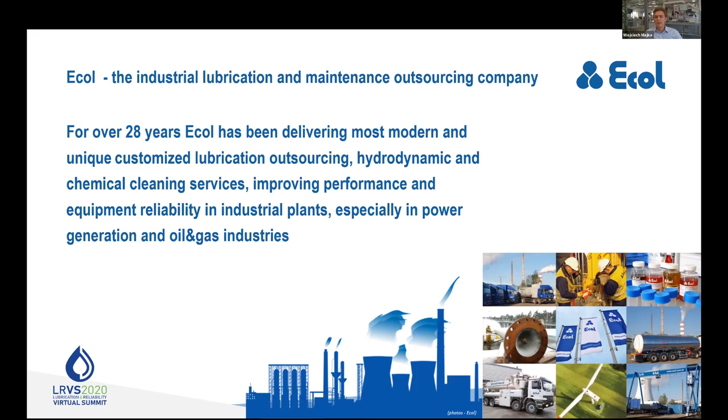So impacting the reliability of equipment in demanding customers, improving performance in industrial plants, especially in power generation, chemical processing, and heavy industries from the very beginning. The overall range of activity is mainly lubrication management activities, and nowadays in compliance with the ICML 55.1 standard, which I will speak about later, doing oil analysis. Just behind me is our lab, our oil analysis laboratory, live view. We do specialized flushing services, cleaning and flushing for big rotating equipment, and there's another presentation by Tomas Klima today later about it here at this outstanding summit. We do chemical services, chemical flushings, different applications for equipment, and other things related to lubrication and reliability.

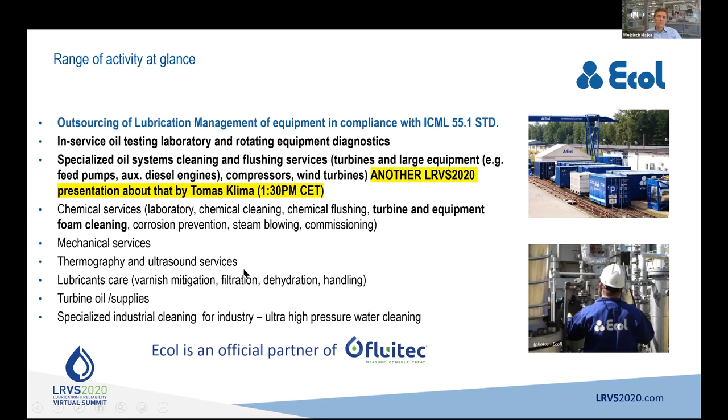We are an official partner of Fluitec. Also, the thoughts that we share are aligned with the concept of smart solutions, smart lubrication. We are more than 340 persons on board in our company, more than 50 engineers. We are a private family-owned company, with almost 30 years of history.

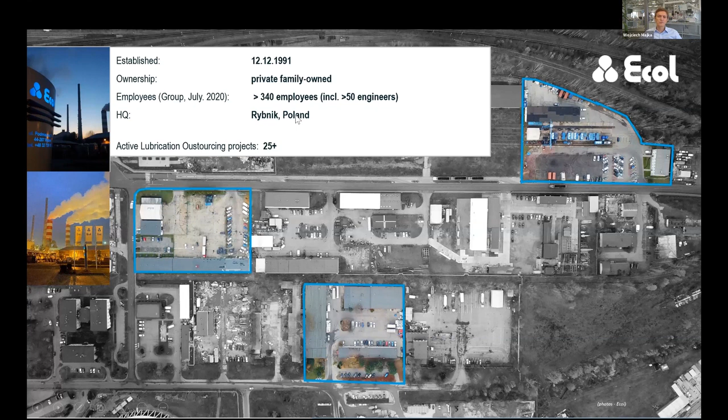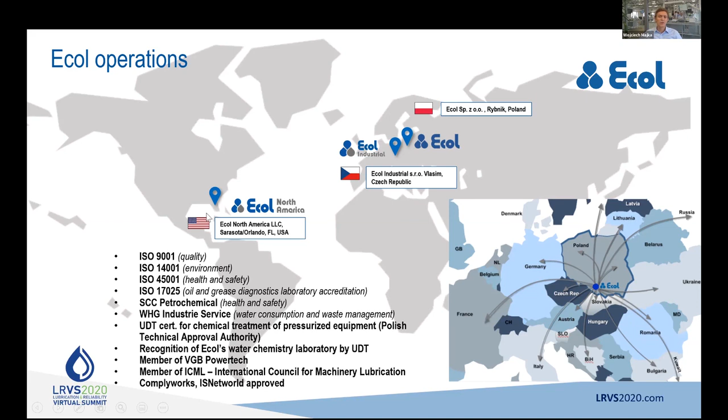We are certified against most international standards in place, both quality standards, ISO 9001, 14001 and 45001, but also different standards required for being an industrial company. The values that we share are being professional and really being fair to people, to the environment, to customers, and doing smart things - how to make things smart.

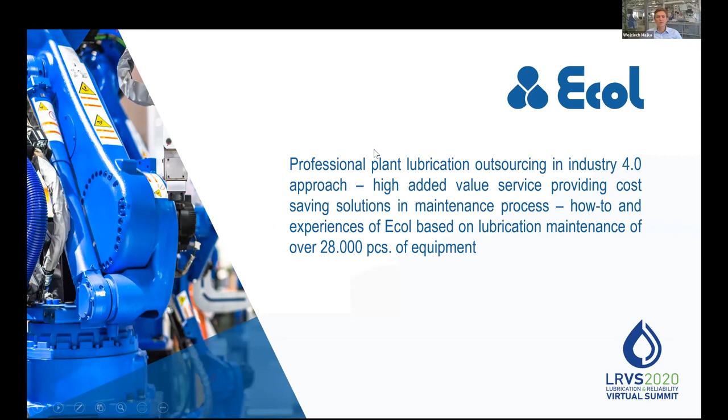The background for my presentation is the daily maintenance we serve to our customers of more than 28,000 pieces of equipment. The second part, the link into Industry 4.0, is that most of our customers and industry facilities tend to be more and more Industry 4.0 plants. Of course that's a huge thing, a separate discussion for sure, what is Industry 4.0, but if we take a look at the timeline, industrialization started, let's say, end of the 1700s, and nowadays, a couple hundred years later, we are doing really outstanding things. So IoT, big data analysis, smart sensors, everything connected, linked. That's how we need to fit the lubrication needs as well.

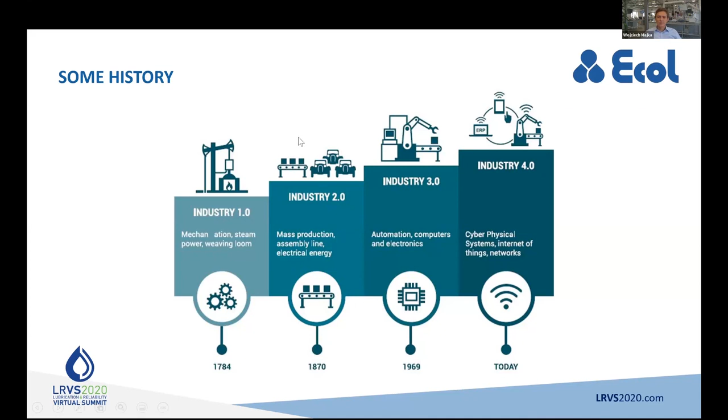I have something with me, that's the old-fashioned lubricator. I don't know how old it is, probably maybe 50, maybe 70 years old. It's well done. It doesn't mean there wasn't lubrication at that time, and it still is, but the reality changed a little bit. So that's why I'm talking about Industry 4.0, outlining that this is something new.

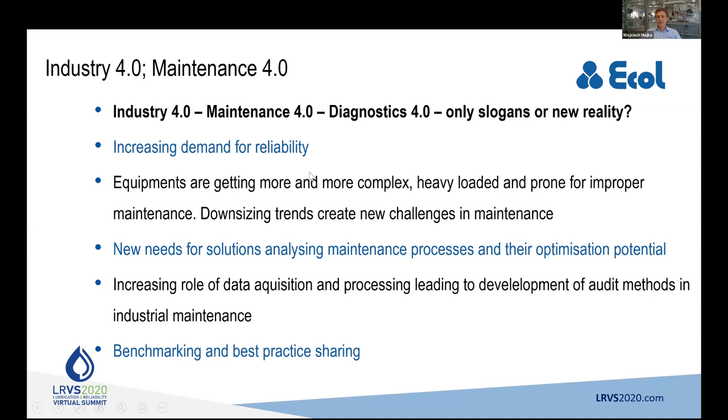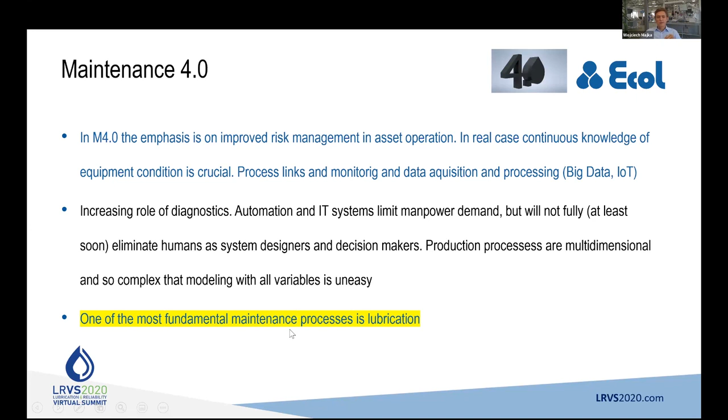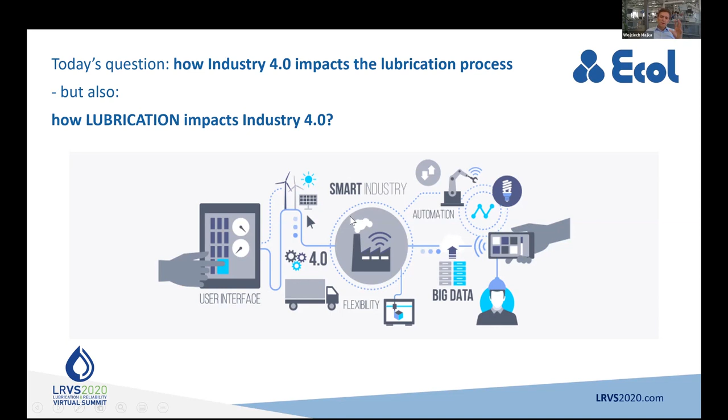So what is it about? Increasing demand for reliability, less costs, more reliability, better productivity, risk management, of course, links between machinery, between sensors, between smart diagnostics - everything that makes reality a little bit different. But lubrication still remains one of the most fundamental processes in industry. So the question for today is how Industry 4.0 impacts the lubrication process. But also, the other question is how lubrication impacts Industry 4.0. It's a very specific connection. Our approach, our understanding, is that we can transform industry through lubrication to Industry 4.0. It's a good example of how we can tend toward being modern.

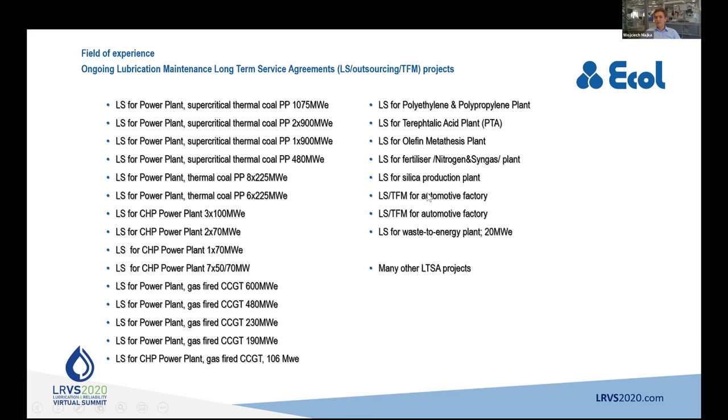Based on that, I want to share with you that the pieces of equipment, single pieces of equipment, more than 28,000, are daily maintained by my company, doing daily maintenance tasks of different scale and range that we'll take later. But the number of lubrication service points, having something in common with maintenance of lubrication, is 65,000, served by 170 people every day. So we can imagine how big the scale of problems and logistics and engineering behind doing it well really is.

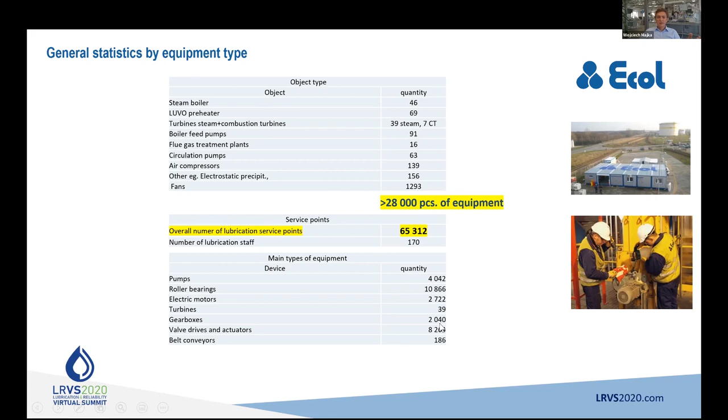Here is the spread or share of different equipment that we have. You can see pumps 4,000, roller bearings almost 11,000, motors, valve drives, actuators, etc. Big numbers, which consume annually around 450 tons of lubricants.

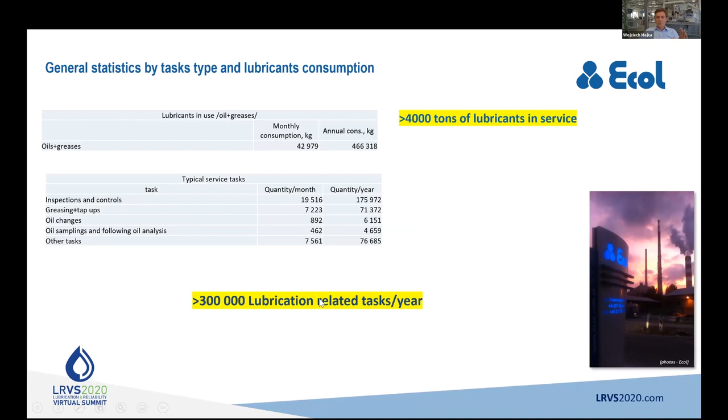It's a big number: 300,000 lubrication tasks a year. Based on that, we have done a program of introduction to lubrication management for our customers.

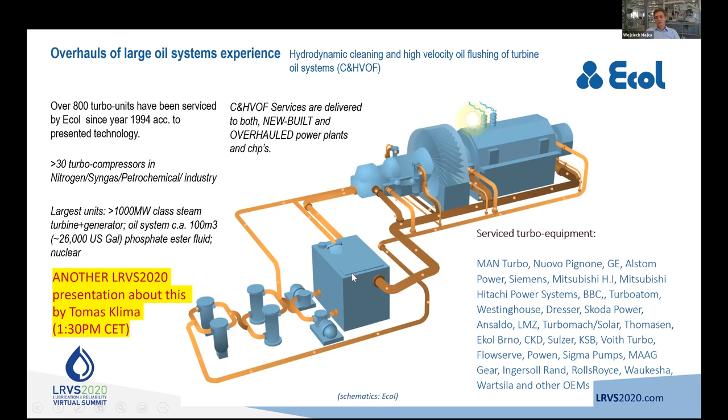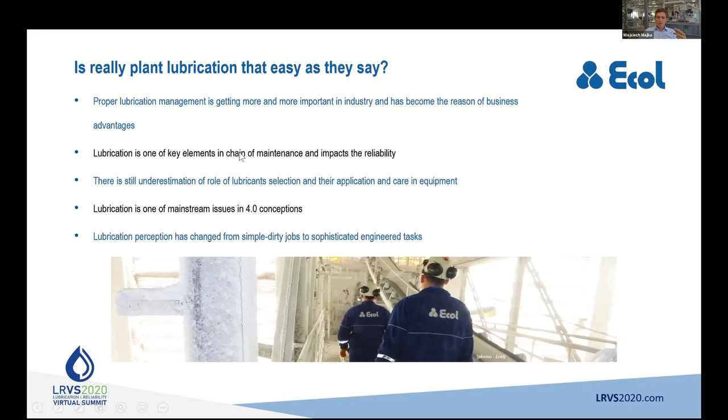I'm not even speaking of overhauls related to lubrication, but if one says lubrication is easy, I wouldn't think so. Simple tasks may be easy, but managing that in a good way, so it gives you added value and lowers the ownership cost of the assets, is very tricky, especially now.

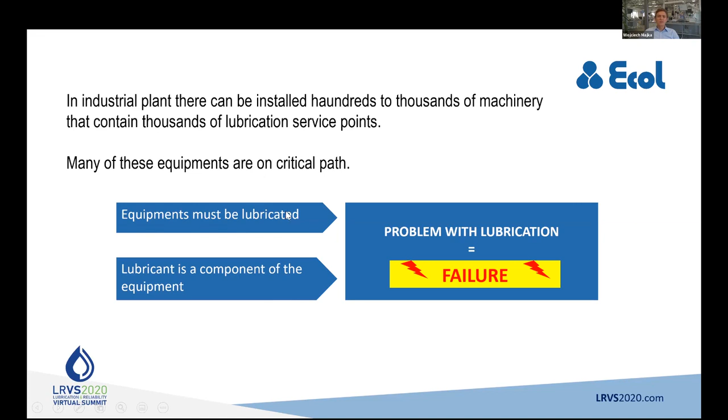When everything is downsized, it's less robust and more prone to failures. Problems with lubrication mean failures, and it's not only in maintenance during the daily life of the plant. It starts in the erection phase, so build up, startups, and normal operation.

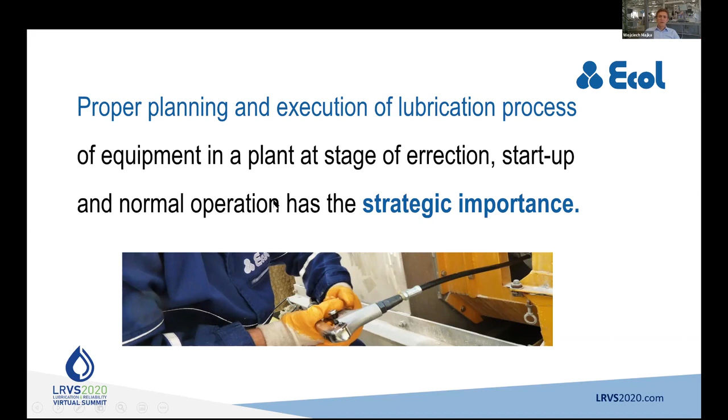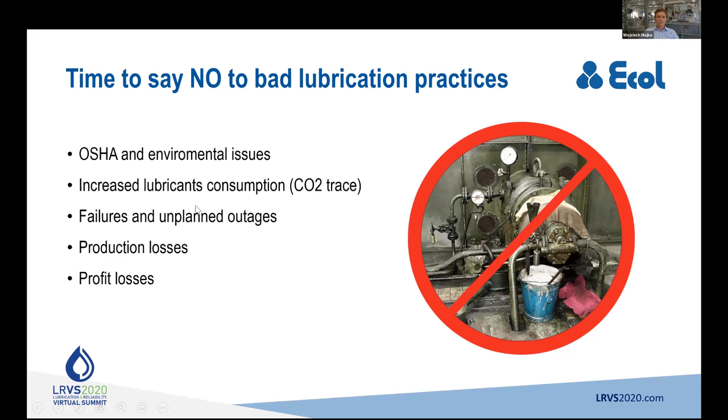That's strategic importance. We say no to lubrication practices that are bad, which impacts safety, impacts costs, of course outages, and profit losses.

It's listed, some thoughts that I will not be reading. You will have this presentation downloaded in the apps and recorded, so you can go back for that.

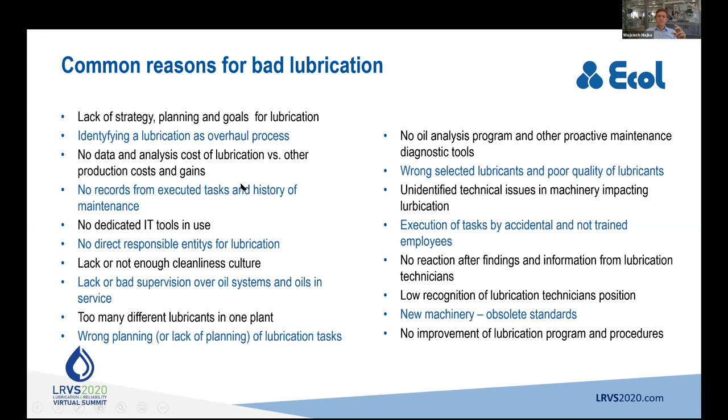But anyway, the original problem in lubrication is that there is no strategy. Sometimes plants have no strategy for how to do the lubrication and what to do in this process.

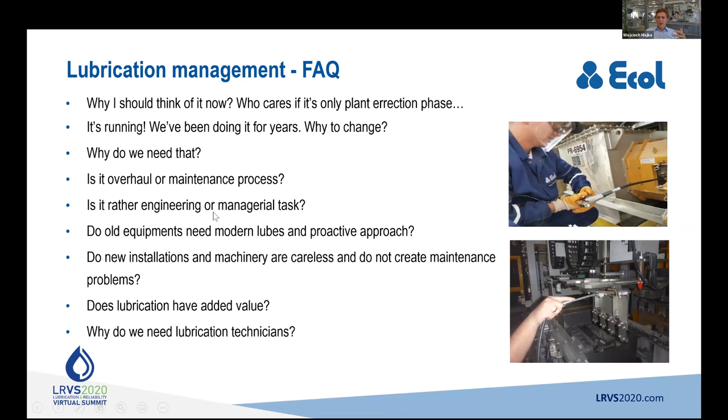If it's important, yes, of course, because lubrication is important. The ICML, International Council for Machine Lubrication, created a standard aligned to ISO 55001 for asset management, which lists 12 areas of lubrication aspects in the lubrication plan that has to be well maintained and well designed.

Here they are: skills, machine, lubricant, lubrication, tools, inspection, lubricant analysis, troubleshooting, waste management, energy, reclaiming, and management.

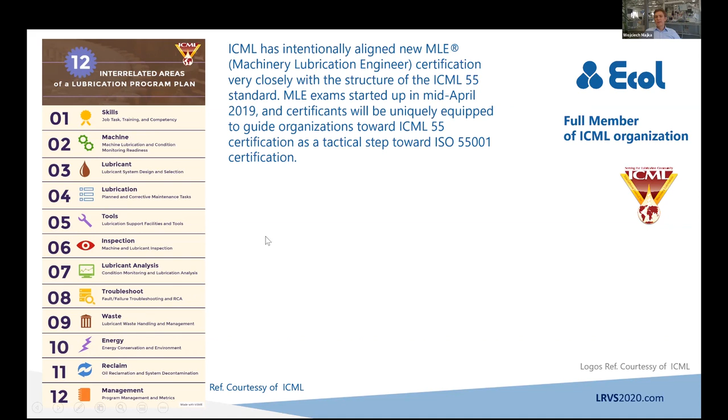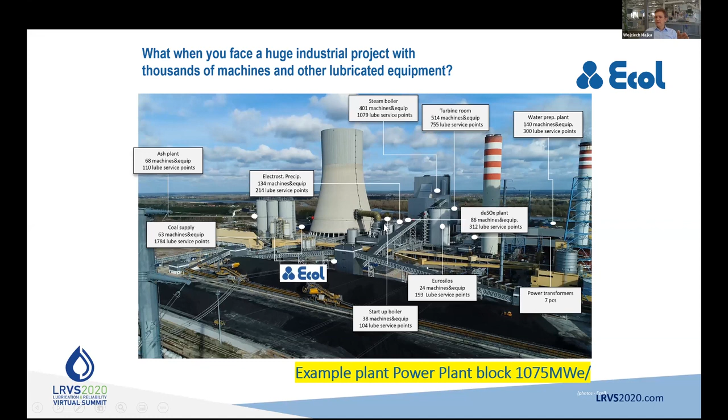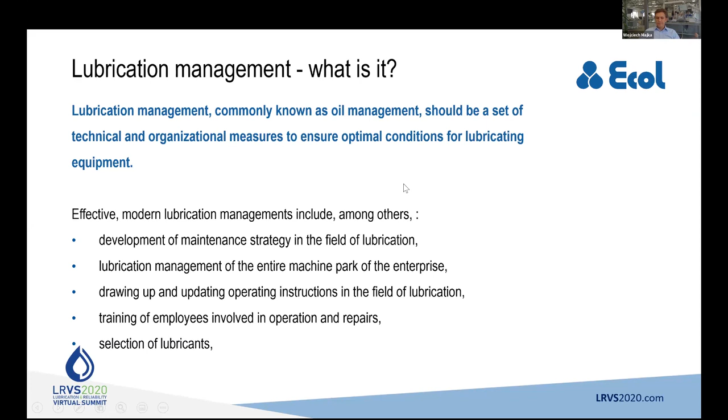What you can do is hire a consulting company that will help you. Maybe you can become an expert yourself and have your own experience to establish the lubrication plan and manage this by yourself. Or you can call a company like Ecol, the service provider, that will do it turnkey somehow. So what is it?

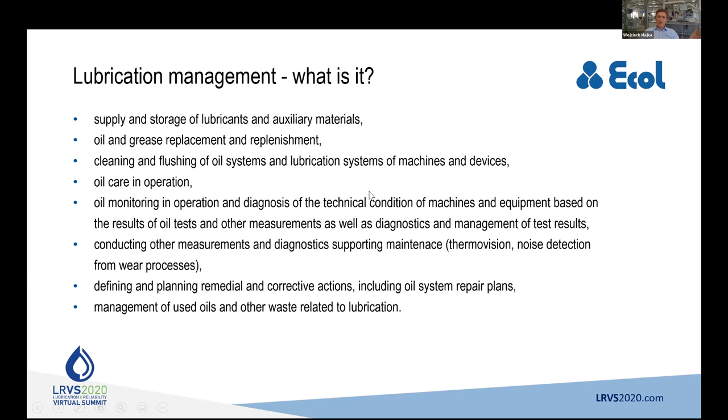Basically the service covers all these 12 areas, but in a way that you can check it and verify if these areas are fitting the master plan. So what we do is not only the job, but doing it in a way that we can prove it's done, with some measures and quantification.

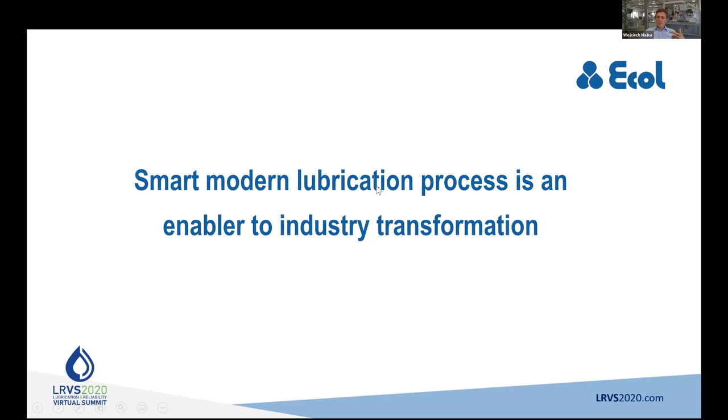Modern lubrication is an enabler to industry transformation. How do we do it? When we have an RFQ proposal, we do a lubrication survey, discuss with the customer what's needed, and contract a long-term agreement, not a week or a month, rather years, with options of extending.

Plant asset listing is a very thorough identification of the needs of each machinery, each single component of the machinery. Of course, you need a database, not a paper notebook, not even an Excel spreadsheet, because that's not enough.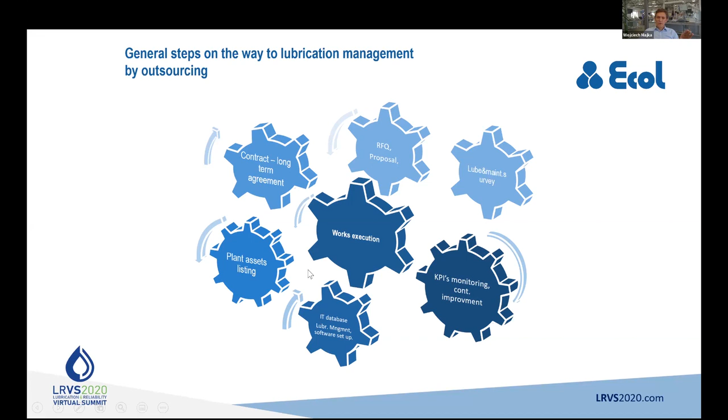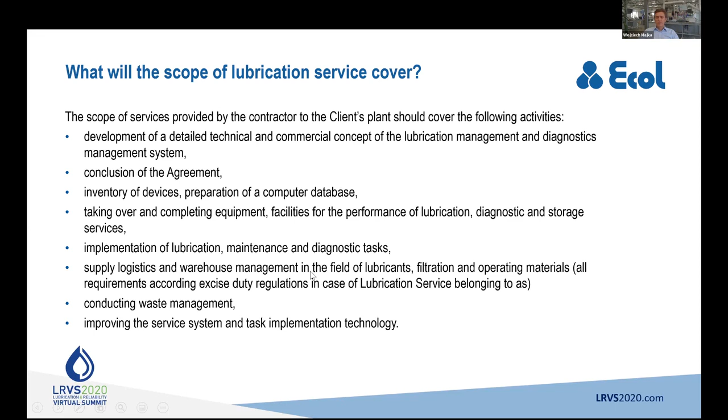You have a system that will manage all the data, giving you access to tools that help with scheduling, recording things, sharing with others, combining with oil analysis results, etc.

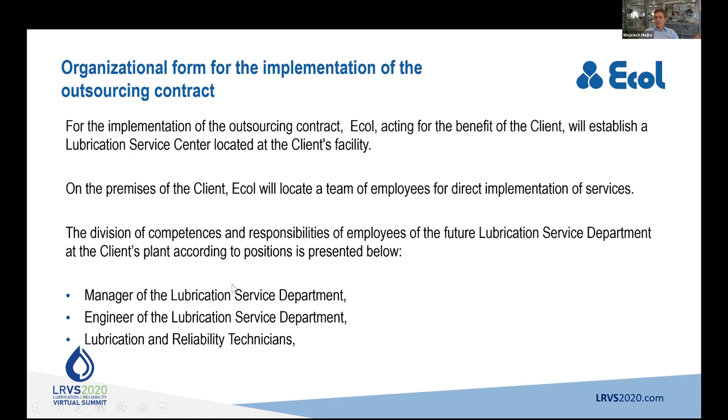So how we do it: we establish the lubrication department with the customer, which has the manager, engineer, technicians, and we have a plan to make it alike other projects. Every project is different, but the master plan and master route is aligned. That's why we can manage multiple projects from our engineering perspective, and they perform well.

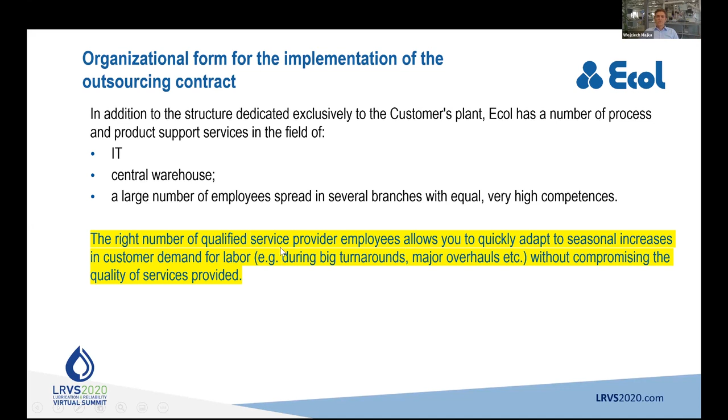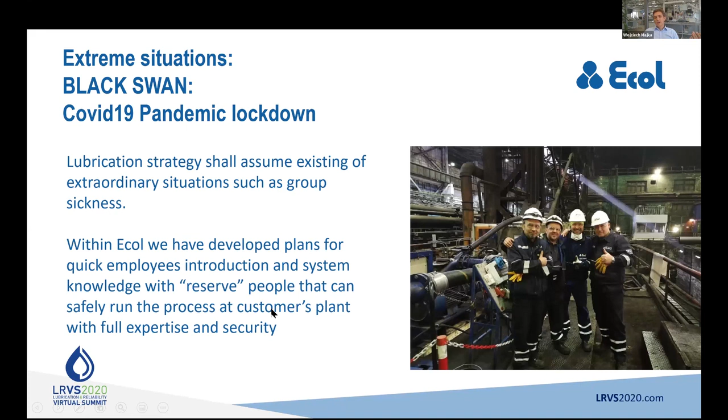Which is important. We have enough employees, 170 of them, that we can easily start up multiple new projects every time. This season we had a black swan everybody had, which was the COVID pandemic lockdown, and it actually helped us manage the process well, because we had enough people that even if we had a lockdown in some plant, we could send new people that were prepared to do that.

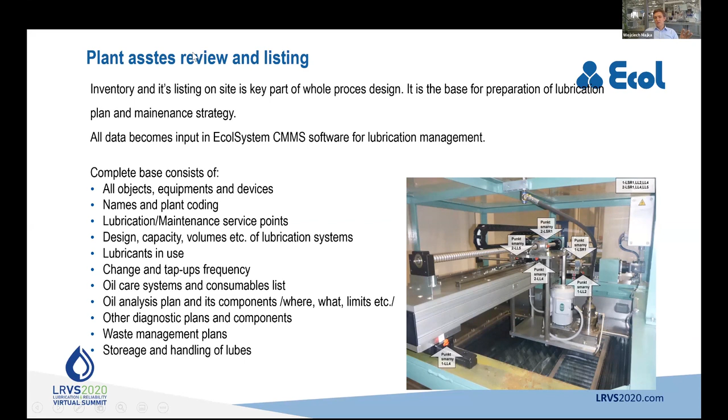What we do with the listing: you have a very thorough walkdown of the equipment, comparing the paperwork with the local needs.

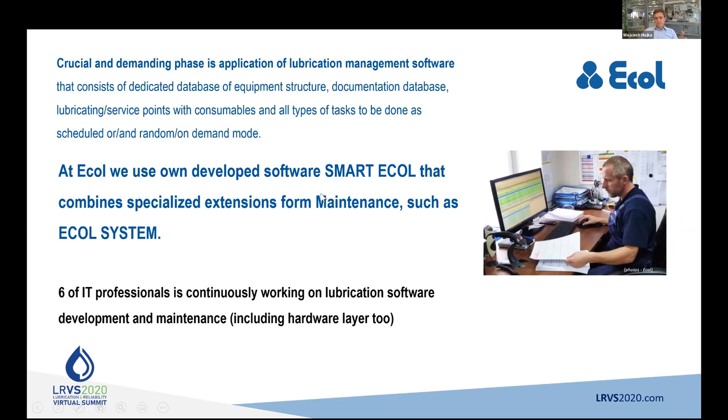The software, we call it Smart Ecol System, which is the maintenance software. We do it ourselves, we have the IT. This is very sensitive software because it relies on the operation of the customers, so it's very thorough.

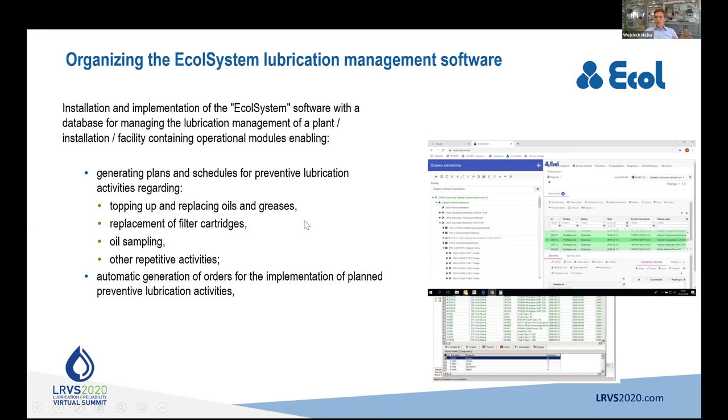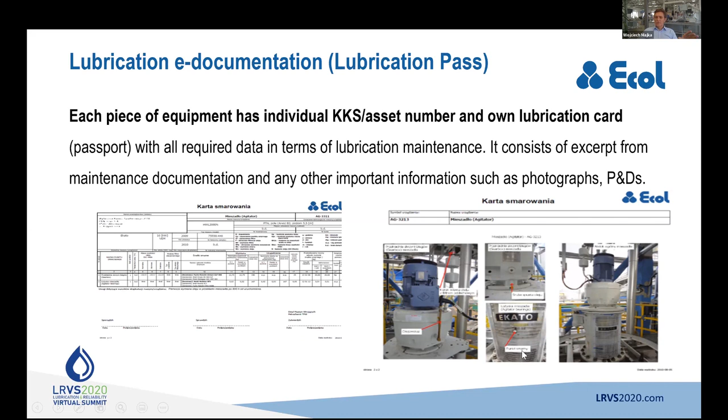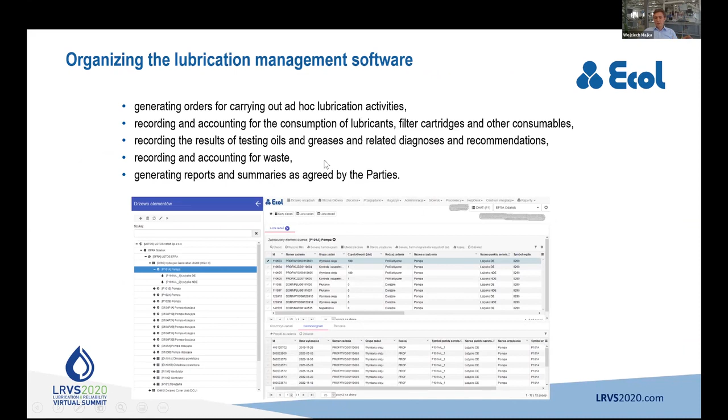I would compare it to the banking system. It's deeply connected to the system operation with the customer. The lubrication passports, lubrication documentation, which is not just a copy of technical cards from the equipment, we do it on purpose for each machinery there is a special card. Of course everything is online in the system, but we have pictures, sampling ports, all the procedures designed for each component. That also takes time for preparation. The software then generates the schedules and the tasks.

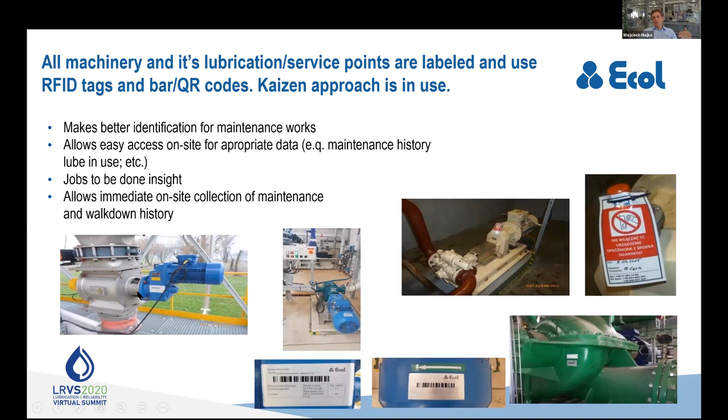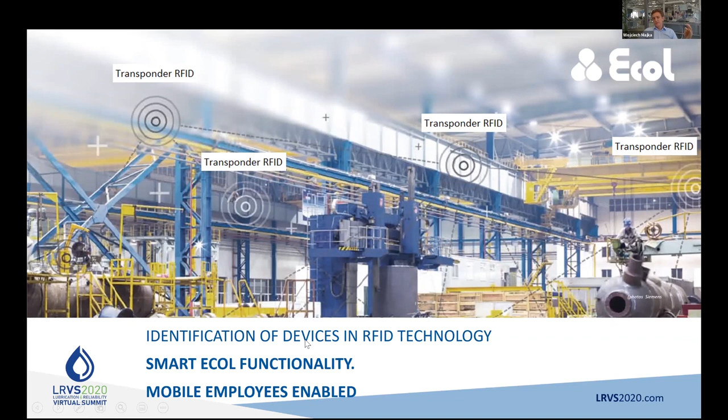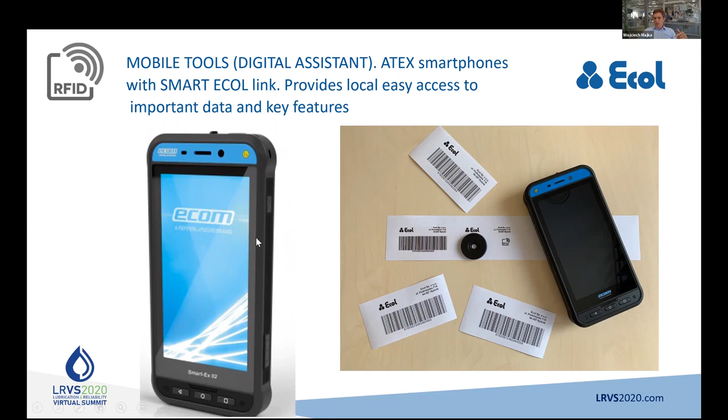What is specific about our approach is that we use coding of the equipment. It used to be barcodes or QR codes, now it's moved to RFID technology. This enabled our mobile employees with smartphones, systems remotely taken to the site, to connect with the points and input the data directly on site, which helps us do it without faults, but also quicker. We use the same technology in our lab for tracking samples and traces, as you can see here.

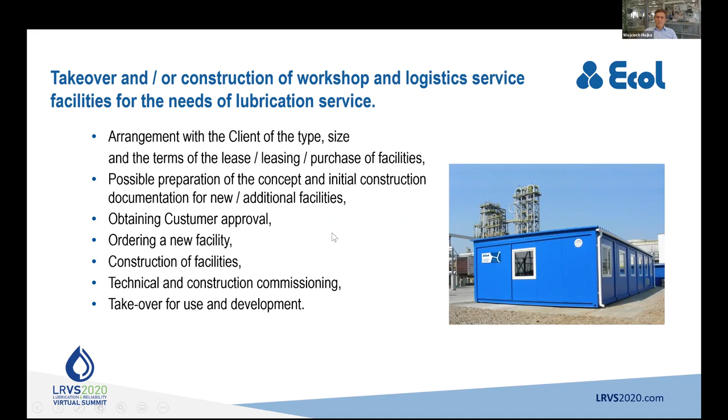The takeover of the workshops - you need to design tools, workshops, places for the operations, because sometimes there is no space where you can even store the equipment and lubes. So this is also part of the game, the facilities that we are investing in. And of course, then you do the works.

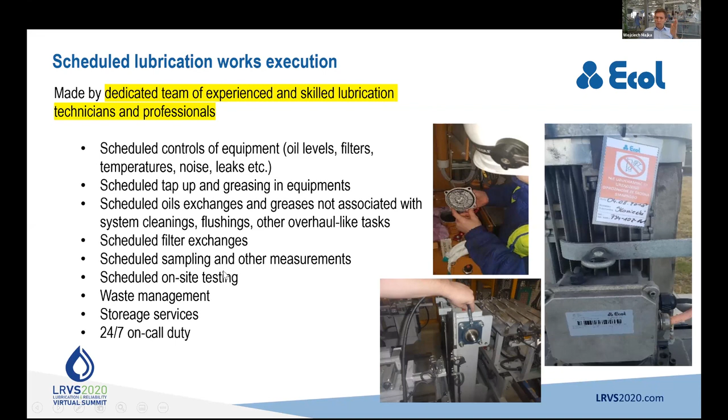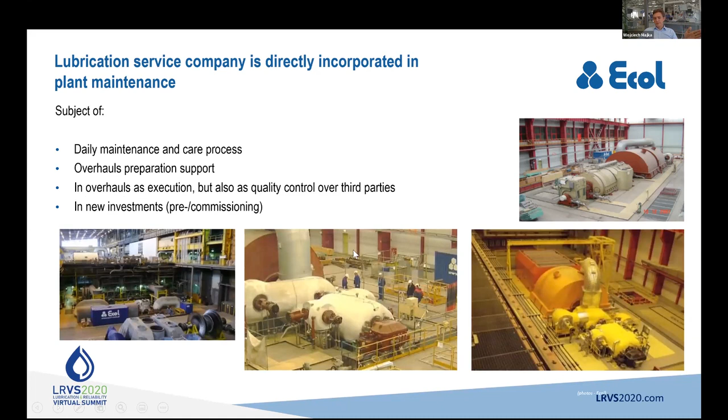The teams have scheduled operations which are pre-scheduled, and we keep to that schedule. And of course we have unscheduled operations, which could be some top-ups, or after some leakage, some water removal, this sort of thing. We are daily incorporated in the maintenance of the plant, talking daily with the customer about the needs, about problems, troubleshooting.

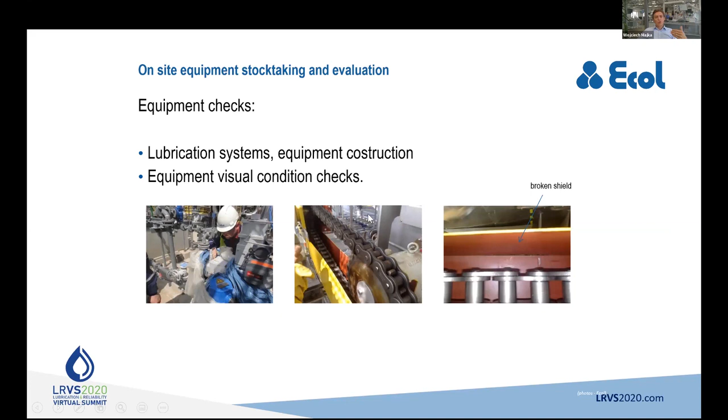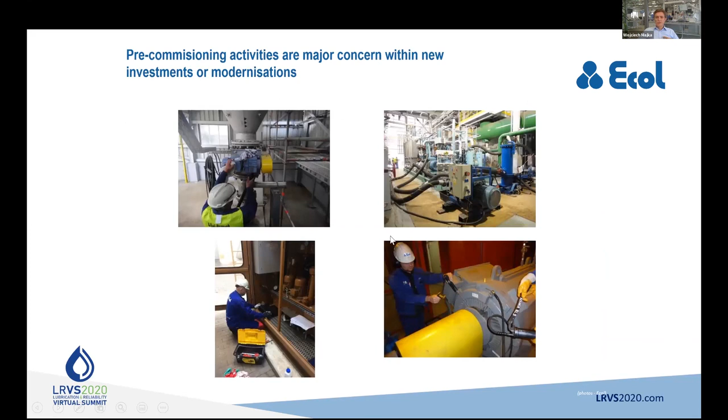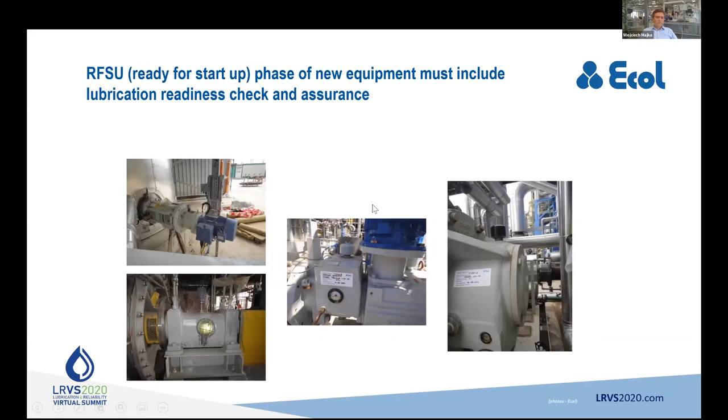It's about inspections of new equipment that comes to site during startups, after some repairs. We are responsible for the lubrication, so we like to be part of the maintenance, also for repairs and activities like that. You can see some pictures of readiness for startup, markings on the equipment, cleaning of systems, some flushings, some bigger overhaul operations - also part of the game.

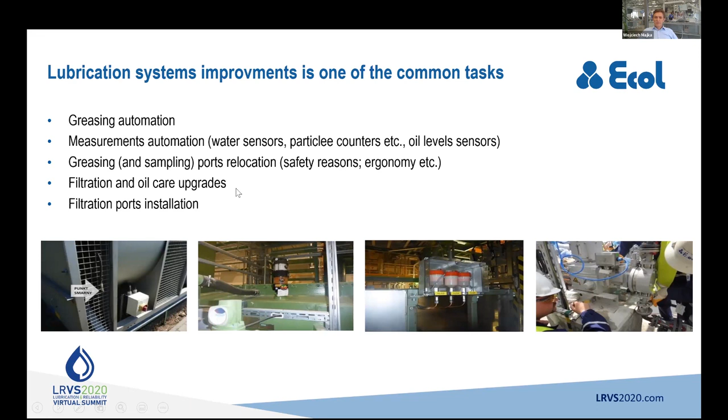A lot of systems need improvement, so automation of processes - greasing, making sampling - these things make life easier from the people's perspective, but also give better quality of work.

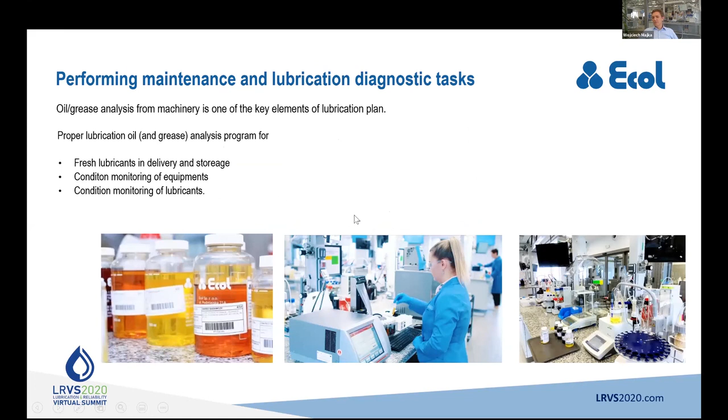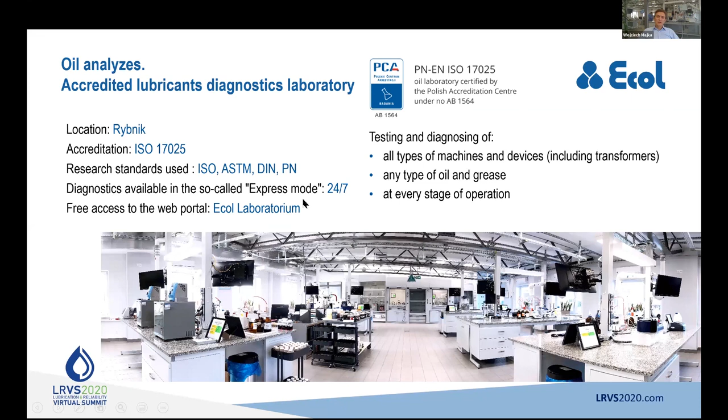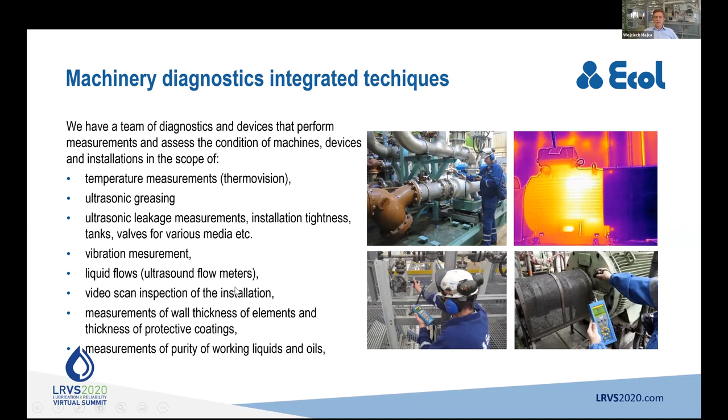Everybody at this conference knows this chart, so I would say oil analysis and proactive diagnostics is very important. We do big oil analysis programs. We also have the lab just behind me, doing it locally, also on site. That's something we find very important, but we also combine it with different technologies like temperature measurements, thermovision, ultrasound greasing, ultrasound leak detection, and of course vibration analysis - everything combined together in the platform where we have the data.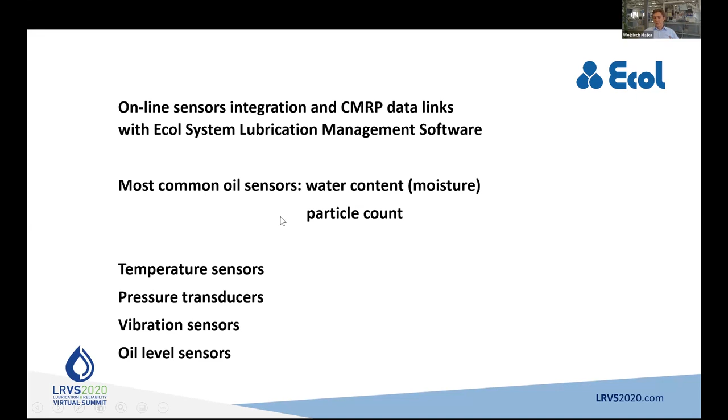We also have online sensors for water content, particle counts, some different sensors integrated into our system. In some cases we have time counters of work hours. Of course, lube rooms, the warehouses of what you need, is part of the game, and this is also very standardized how we do it - we have a plan about it.

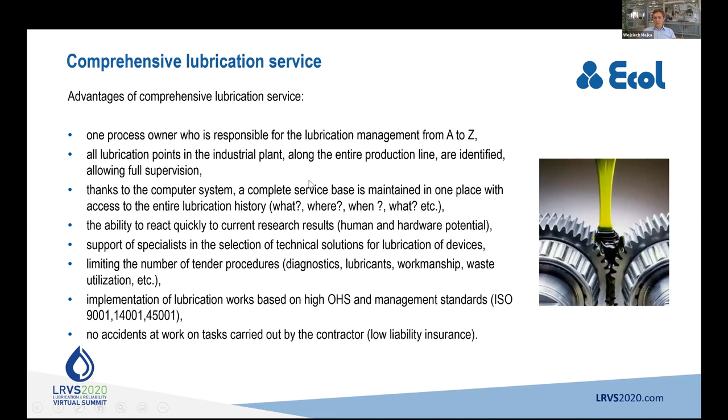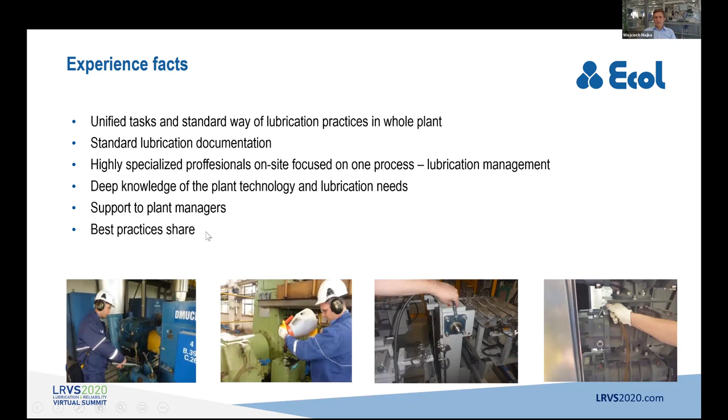Running such a new project, sometimes it's weeks, it can be even months for a start, but anyway everything is unified. Employees are skilled and standardized in their skills. We have knowledge of plant technology and best practices shared. So new customers are not rabbits, some testing animals that we are just experimenting on.

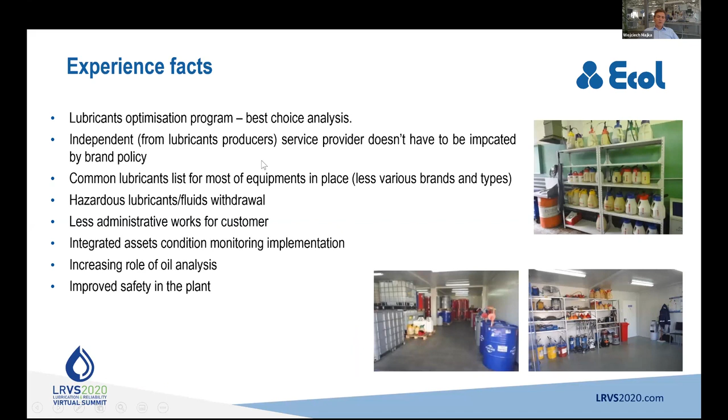No, we have Wojciech - this is fantastic, and I want to make sure that we have time to get to some of these questions. I'm really near the end, George. Just a couple of slides, and I'm done.

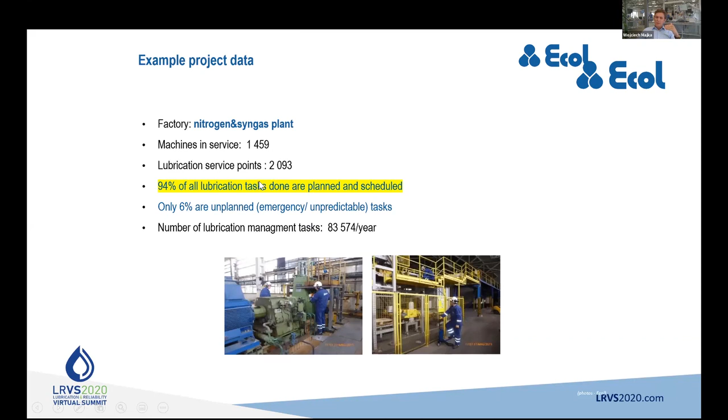As you can see here, we believe that planning and scheduling is something important, so that is why we do it thoroughly. We plan and we stick to the plan with the systems.

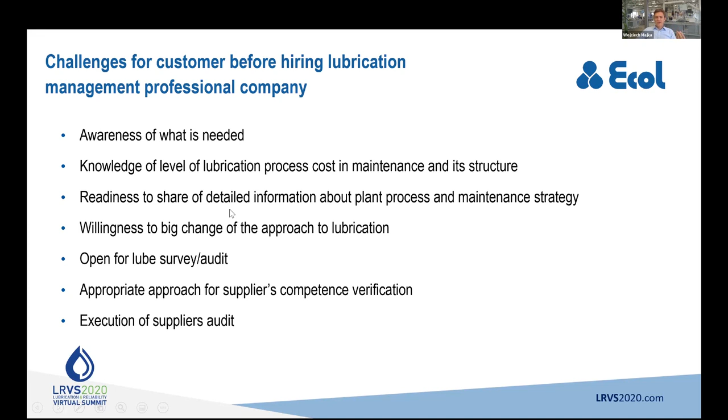The challenges for the customer when hiring a lubrication company: awareness of what you need, what is your understanding of the project, openness for audits, and of course how you buy it - the process of RFQ and bidding. And being aware that you are choosing someone who is daily with you.

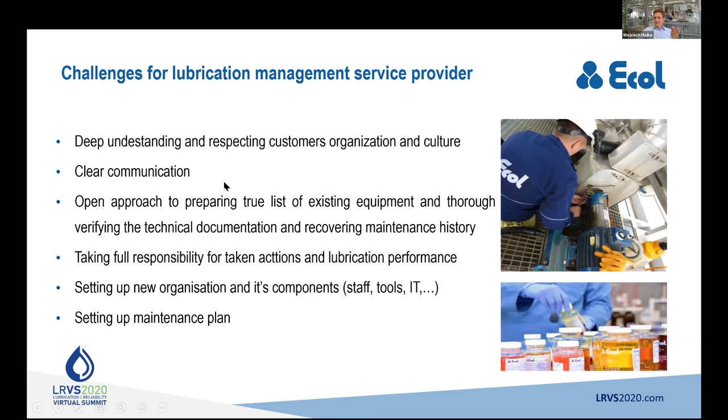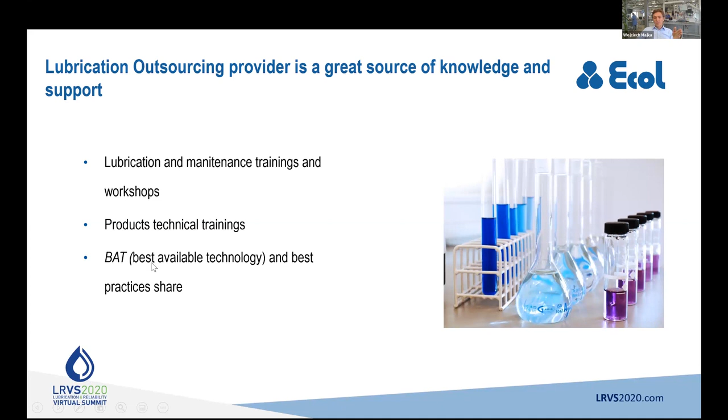So it's a very important maintenance plan. And for the service provider, it's also not somebody who just says 'I was in the plant once.' It's somebody who should really understand the needs of the plant, the customer's understanding, big enough to invest in some stock of equipment, and having also best available technologies, understanding the engineering behind it.

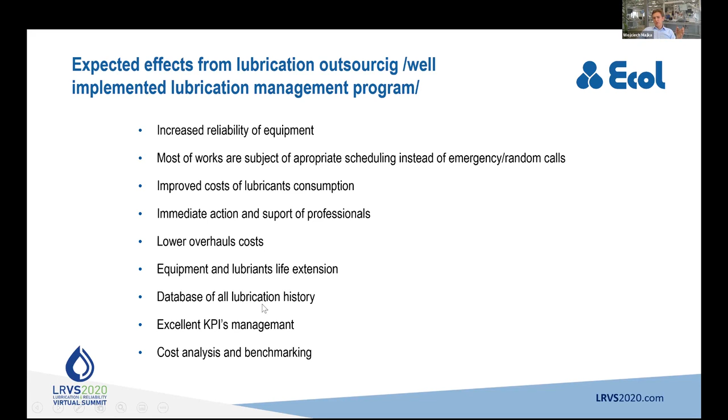So that all means that if you introduce lubrication management and outsourcing well, for sure you will have increased reliability of equipment. You will have lower costs at the very end. You have KPI management, and probably you will have more time to take part in such great events like virtual summits, not firefighting problems on site. So thank you everybody for your attention, and we are there as a sponsor, at the booth, at your disposal.